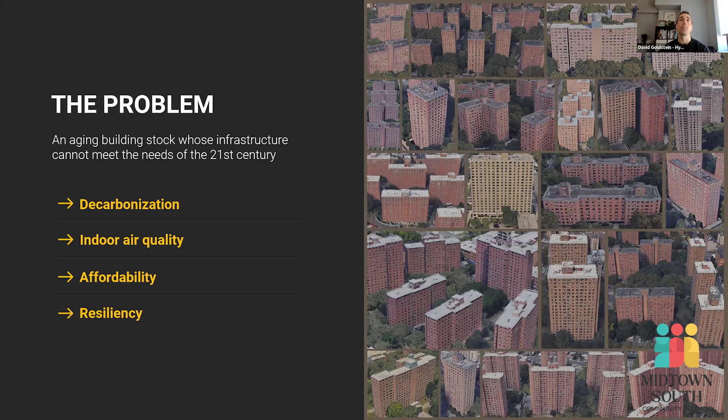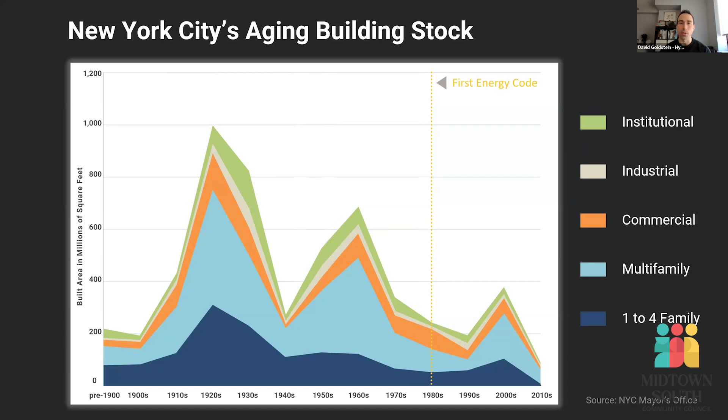This is just a chart to put an image on how old our building stock is. This is going back to pre-1900s all the way to the last decade, showing all the construction in New York City. It really shows how old our city is. Not only that, it shows that our city is more multifamily than anything else. People think about New York, they think about big fancy office buildings and fancy things like that. But this city, more than anything else, is old multifamily buildings. And so that's really the area we need to figure out how to solve.

So again, echoing most comments, the real question facing us is how do we actually modernize the infrastructure of these old buildings? And knocking them down is simply not an option. I'll explain what I mean by that.

You can look at an individual building and look at the retrofit options and come to a conclusion, as Mo said, that maybe it's so expensive to retrofit, maybe economically it makes sense just to knock it down and build a new one. You can maybe make that economic argument. But really, that's just showing how desperate we are. That's just showing how bad our current retrofit solutions are, that we would actually even consider that.

Well, that's really missing the forest for the trees, because we need to think about scale here. I just showed that graph, that chart. We have tens of thousands of these old multifamily buildings. And there is no way our city is going to knock down tens of thousands of old buildings and rebuild them. It's simply impossible. From a cost perspective, from a labor perspective, we don't even have enough labor for our current construction industry. Forget about thinking about knocking down all these buildings and building new ones. There is no labor to do that.

The amount of waste that would create, the amount of carbon emissions involved with building a new building—just extracting the materials, manufacturing the materials, shipping them, building the buildings—the embodied carbon to rebuild all those buildings would totally shoot all those 2050 goals. It would make it laughable. And then there's obviously tenant displacement. We're going to knock down all these buildings—where are all these people going to go? So again, when you look at an individual building, maybe you can make an economic argument. But when you look at the big picture, it's simply an impossible solution.

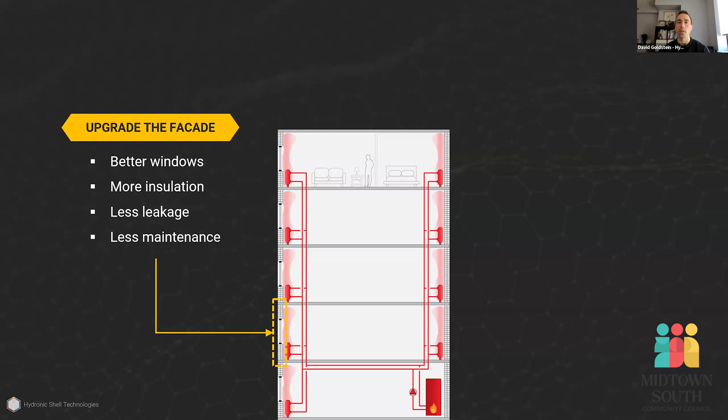And the other piece is the HVAC - the heating, ventilation, and air conditioning.

So let's start talking about the facade. There's actually a lot of progress that's already been made. And how do you upgrade the facade in a building like this?

This is a program called Energiesprong out of Europe, where they developed this approach where they prefabricate these panels, these insulated panels, and install them like Lego pieces on the exterior of a building.

It's a way to improve the facade, but to do it quickly, to do it cost effectively, without disrupting the tenants. It was really quite groundbreaking that they figured out how to do this.

But they're doing it on small buildings, 2, 3 story buildings, and it's a different climate in Europe where they're doing it - it's not as harsh as it is here.

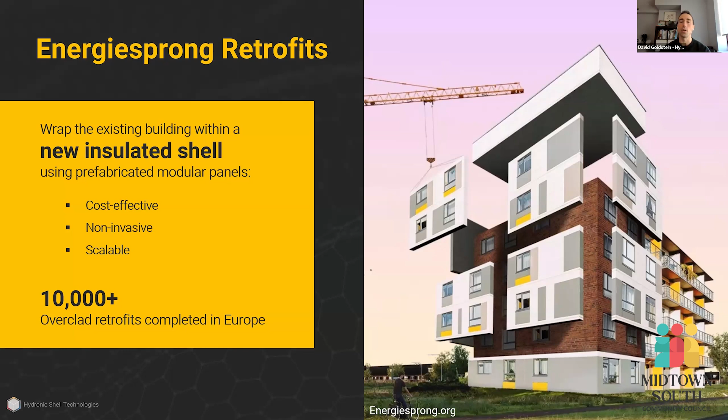So the question is, okay, can we take this and can we do it here, with our buildings? And the answer is yes. So I love this example.

And just make the building more beautiful - a true revitalization of this building from the perspective of the facade. And so they've done it there, and we can do it here too.

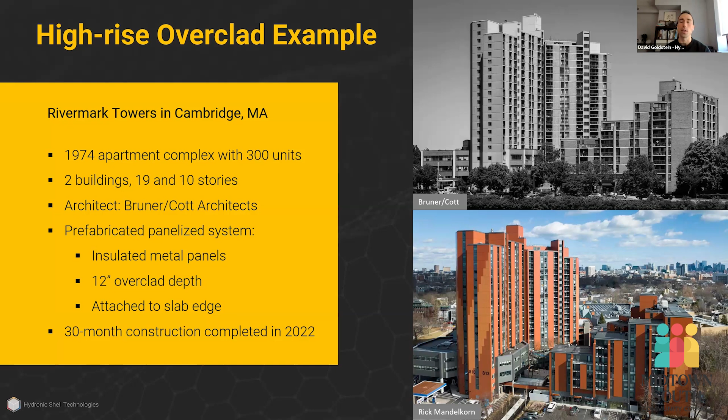Now the cost right now is high. That's because it's new - any new technology, any new approach is more expensive in the beginning. As we get better at it, as we get economies of scale, the cost can come way down, and this can become much more affordable.

So that's the envelope piece of it. We're heading in a good direction when it comes to the facade.

It cost them - they didn't touch the facade, they didn't do anything else, no ventilation or anything like that, just these heat pumps - $176,000 per apartment. So that's what we're talking about with this being unaffordable.

This is something that, if you were to install this system in a new building, it might cost $25,000 per apartment. So why did it cost $176,000 per apartment? It's because of this tenant disruption issue.

And if you look at all the quotes from NYCHA, from NYPA, who supported it, that's basically what they say - the tenant disruption just makes this impossible. Running pipes all over the interior of the building, displacing tenants, just drives the costs way up.

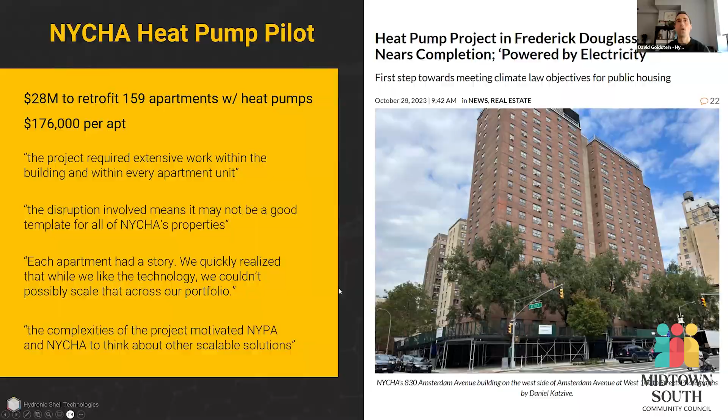It's just not a tenable approach. This whole tenant disruption thing is really a showstopper. We need to figure out how to address it. It doesn't work for the tenants.

Obviously, the tenants don't want to be disrupted, but it doesn't work for the owner operator either, because it drives up costs. It makes it more complex. It makes projects take longer. It doesn't work for anybody. So we need to figure out a better solution.

Just in the interest of time, I'm going to move a little quicker, but this is an example from a project that I worked on that opened my eyes. This type of system should be easy to install, this little new wall mounted unit.

But when the interior of your apartment looks like that image on the left, which most of these apartments do, it's incredibly disruptive. You have to go take down furniture - you're like a bull in a china shop in these apartments trying to make room to install this new equipment.

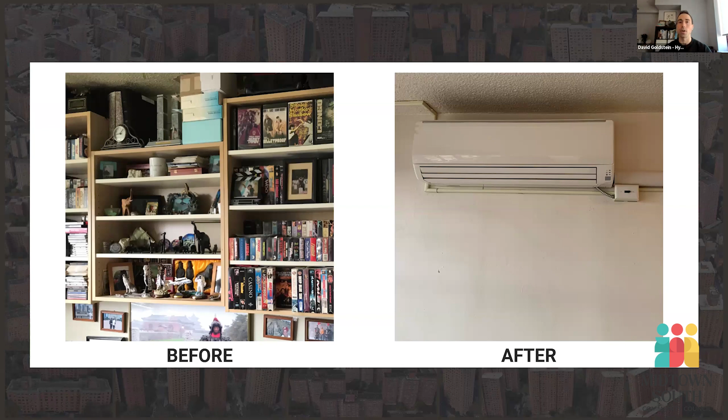So we simply can't take this kind of approach. I'm going to now share what a new approach looks like. This is a representation of an existing building, and this is how we propose a much better way to heat these buildings. You can think of it like wrapping the building in a heated blanket.

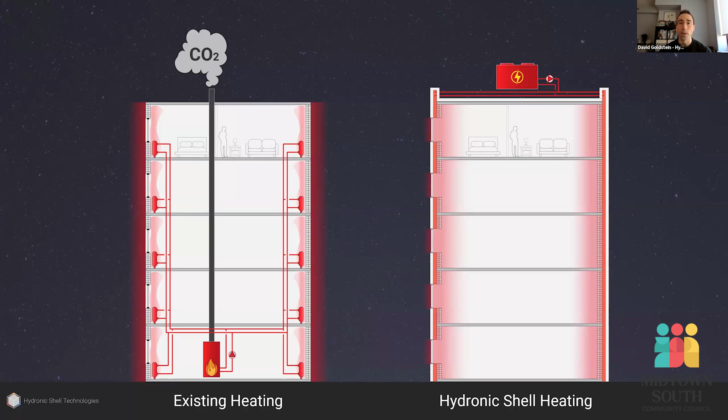It's like that overclad we saw being done in Europe and in Boston, but actually making that new facade heat up so you're heating the building from the outside in. It's much more efficient, much more comfortable. Plus you can do it from the exterior, non-invasively. So it checks all those boxes.

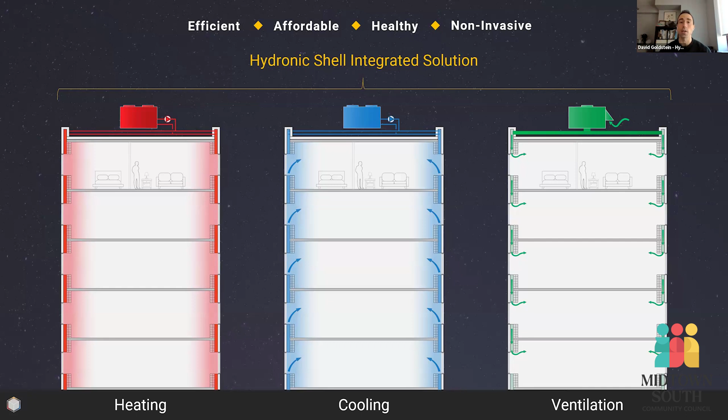But what we're also doing is incorporating the cooling and the ventilation into that, so it's really checking all the boxes. And it's all done on the exterior, all done non-invasively. I'm ending up taking more time than I had planned, so I'm going to skip over some of the details, but this is intended to show just a little more technically how this works.

We're installing new equipment on the roof, central equipment, and running all the distribution down the facade. That distribution is feeding into this HVAC unit incorporated into the facade, and that unit is delivering conditioning into the space completely from the perimeter. So this whole system is getting installed on the exterior of the building. We have to remove the existing window, but then it's all happening on the exterior. What we're showing here is that new facade, and we're showing new central equipment up on the roof.

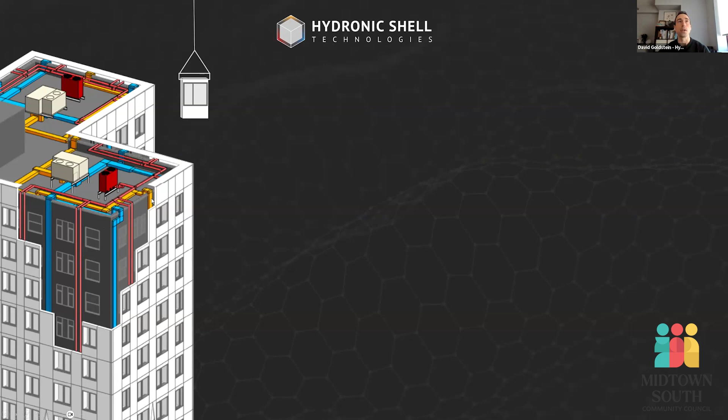The problem we're solving really is the distribution from that central equipment. You'll hear people talking about how great heat pumps are, how efficient they are, all these wonderful things about heat pumps. That's not the problem. The problem is how do you get the heating and the cooling from the heat pumps to the actual units. That's where our distribution system comes in, running that distribution in the facade.

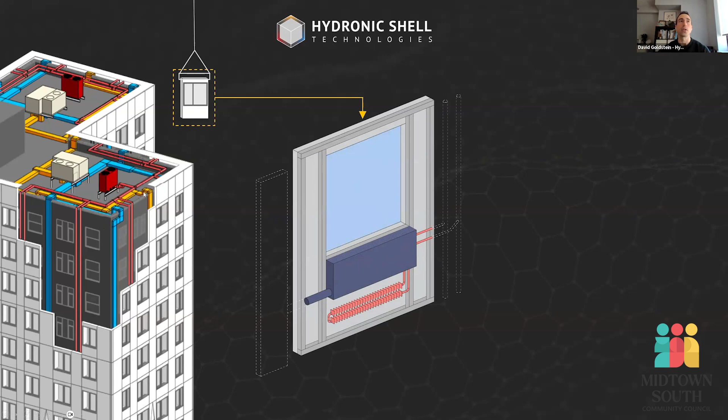And then developing these panels that basically plug in to that distribution. So you're installing that facade on the exterior, and you have this unit we call the hydro box, which is delivering that heating, cooling, and ventilation into the apartment. It's basically plugging into that distribution. You have your pipe connections on one side, your duct connection on the other side. So each of these panels plugs into those risers running down the facade of the building.

And then you can see that unit providing air into the space, providing the ventilation air into the space. It's providing the heating and the cooling. And then we also have this essentially like a radiator sitting in this cavity space. That's what's creating that heated blanket effect. So you essentially end up with this warm cavity around your building, and that warmth will radiate through the uninsulated wall and create a radiant wall.

You've probably heard of radiant floors and how wonderful and comfortable that heating system is. Well, this is even better—this is a radiant wall. So you're not even going to have that cold coming in the first place. Instead of feeling a cold exterior wall, you're going to have a nice, gentle warmth radiating into your building.

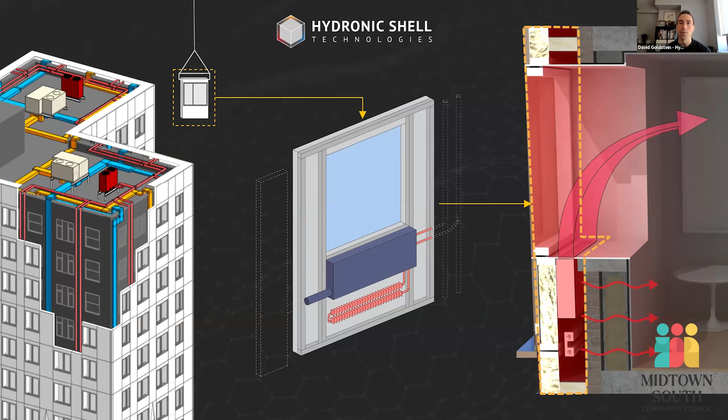So it's extremely comfortable. And what it also does is it actually stores heat in that masonry. That masonry has a lot of mass to it, and we're storing heat in it so that if you have a power outage, or even if the utilities want to do what they call demand response—where they're overloading the grid and want you to cut down on consumption for a few hours—you can just turn the system off, and that heat will keep radiating in from the masonry. So it's actually turning that old inefficient wall into an asset for the building, because it's becoming thermal storage for the building.

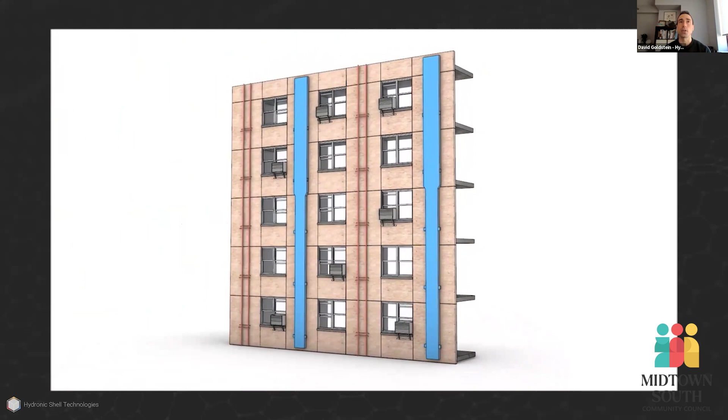This was just to give you an idea of how the system is installed. We would install those risers from the rooftop equipment, remove the existing windows, and then using a crane in most cases, lift these new panels into place. All that HVAC infrastructure, the hydro box, is prefabricated into the panel. So now you have a relatively simple process of connecting those risers to those panels, and then you install the final panels over the risers, completing the installation from the exterior.

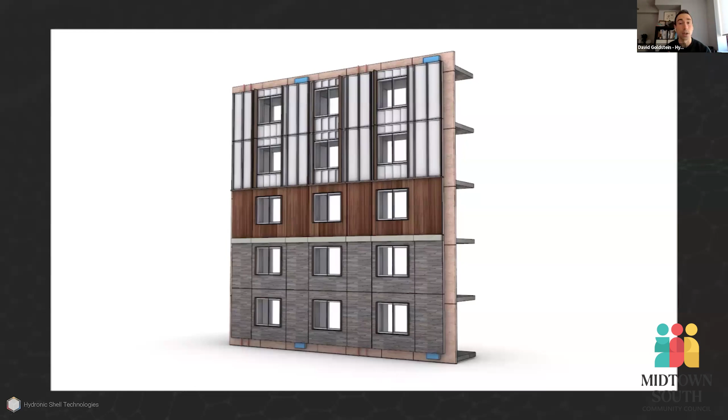There's a little bit of interior work that has to happen, because someone needs to go in. You might be removing the window from the interior, and then you just need to finish around that window opening. But it's very non-invasive, and it'll all happen in less than a day. You just need to let the contractor in, get to the window, and then the contractor can leave.

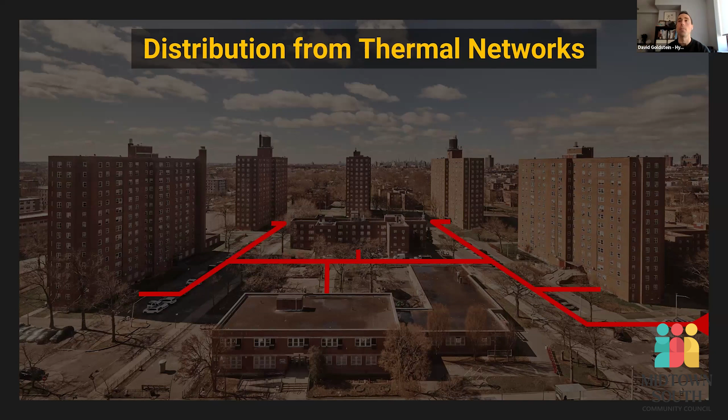Another thing I wanted to touch on: there's a huge push in New York to develop district thermal networks, or geothermal thermal systems, which are very similar. When you step back and stop looking at individual buildings, and look at the bigger picture of these large complexes, in many cases the best way to heat and cool them is with super efficient central equipment that distributes to all the buildings. There's a law recently passed in New York State to support the development of these networks. The utilities would actually operate these networks in most cases, so they're a huge stakeholder here as well. But the thing about these networks is you can bring this efficient heating and cooling to the building—then again, how do you actually distribute it to the individual apartments? That's where our technology plugs in, to essentially solve that problem and really enable these kinds of district networks to flourish in the city.

Now, this is just a quick look at the benefits of doing this. You don't have to be a rocket scientist to see that there's going to be major reductions in energy use, because we're super insulating the building and putting in a super efficient heat pump system to heat and cool it. So the building energy consumption comes way down, your energy bills come way down, and the peak demand on the grid comes way down.

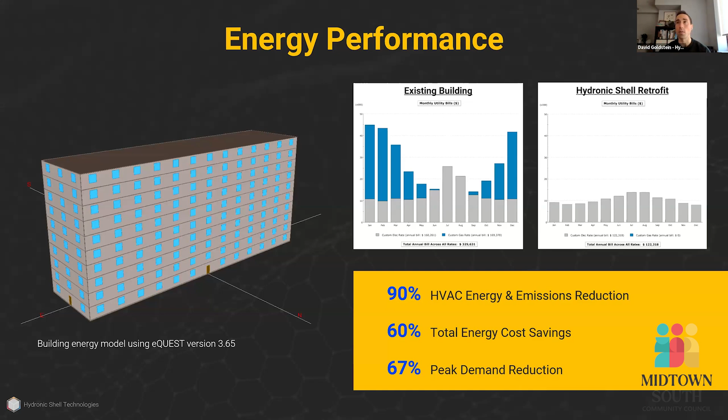Now, Mo mentioned costs, and that is obviously what it comes down to in many cases—the dollars and cents. How much does this cost? The way I like to look at cost is to look at what you're saving and what you're paying. That's the full economic picture.

So if we start by looking at what you're saving when you do this kind of thing—this is looking at a stereotypical 100-bedroom, 100-unit apartment building in the city—how much you can save in energy costs, how much you can save in facade and HVAC maintenance costs, and how much you can save in CO2 emissions. Going back to Local Law 97, avoiding these CO2 fines, and if you actually get below your limit, you're able to sell those credits to others. So there's actually money to be made and saved on the CO2 emissions side. This building could see significant savings.

Now let's look at the cost side of it. I like to look at this from a financing perspective, because in most cases these projects will be financed with loans—they're not just paid out of pocket. So if you were to pay for this retrofit with a 25-year loan at 8%, here's what your annual loan payment would be. The key is that the loan payment is less than the savings. What we're saying to a building owner is you can take out a loan, no money up front, to do this project. Yes, you'll have to pay for that loan, but your savings will exceed that payment—so you have no money out of pocket and you're cash flow positive from day one.

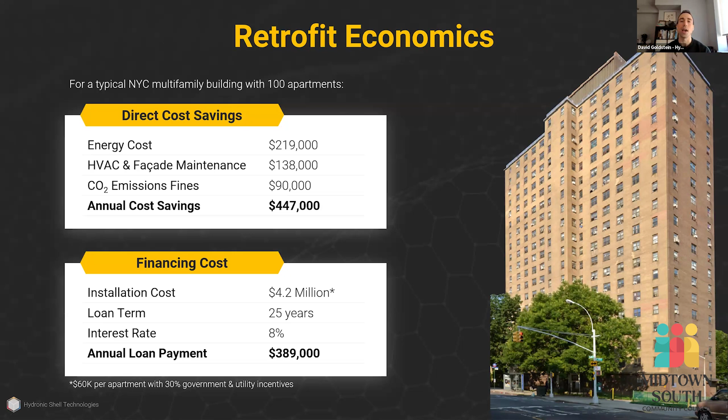I mentioned that when you're doing something new, the costs are always higher in the beginning. So whether or not we can achieve net zero cash flow on the first project, the answer is no, because it's going to be more expensive. But once we get to scale and achieve those economies of scale, we can absolutely achieve this net cash flow positive scenario. So that's the economic side.

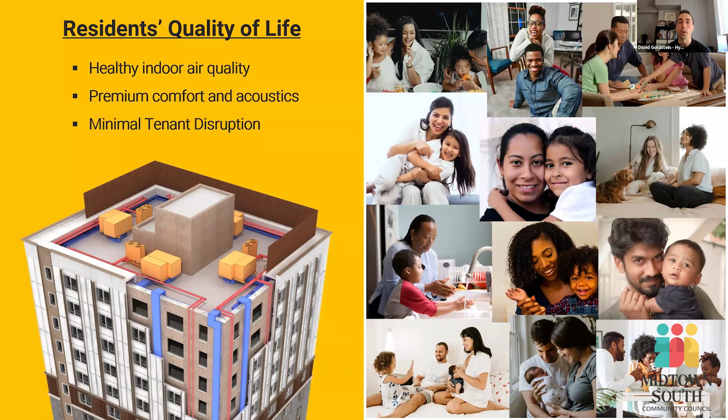Let's look at the tenant side and the benefits to them as well. We're making huge improvements to their indoor air quality and health, which from a broader public health perspective has huge benefits for society and for economies.

It's going to be the absolute best in terms of comfort, but also acoustics. The heating and cooling system will be very quiet, and when you super insulate a building, you don't just block heat transfer, you block noise transfer too. So noise from fire engines, motorcycles, kids making noise outside that disrupts people's sleep and quality of life—we can really make a huge impact on that as well.

And then, of course, doing all this with minimal tenant disruption. So the idea here is that we're aligning the benefits. Not only do the owners and operators get huge benefit from this, but the tenants, the people living in the building, get huge benefits too.

This whole affordable housing conversation we're having now, where the two sides are kind of butting heads—I see that as happening because there are no good solutions right now, only bad solutions. And when you only have bad solutions, somebody's going to get screwed, so you fight over who's going to get screwed. And to Luana's point, it's the people who don't have the political voice who are going to get screwed.

But what I want you to imagine is a different scenario where we can actually have solutions that are good for the owner operators and good for the tenants. Imagine once they're aligned and both want to see this happen, both pushing this forward together—just imagine what an impact that could have on the city, to the benefit of all of us.